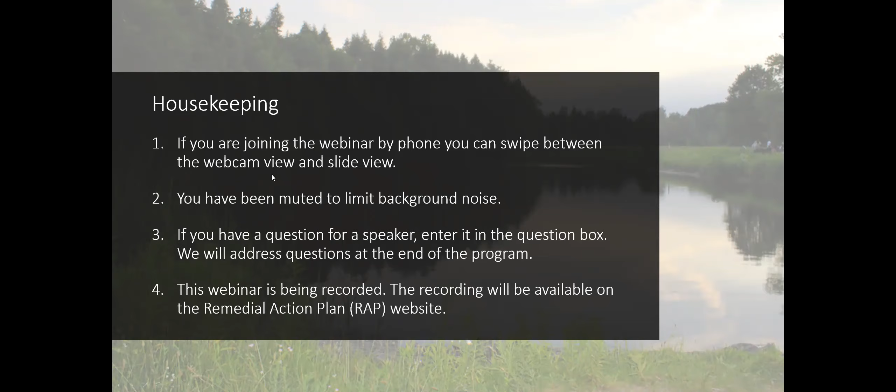We'd like to begin our event this evening with a land acknowledgement. Although we find ourselves geographically dispersed today, meeting here in this online environment, I'd like to begin by recognizing that we all work, live, and gather on traditional Indigenous territory. Toronto Region Conservation Authority, or TRCA, respectfully acknowledges that the lands we're situated on are traditional territories and treaty lands, in particular those of the Mississaugas of the Credit, the Anishinaabe, of the Williams Treaty First Nations, the Huron-Wendat, the Haudenosaunee, and are now home to many diverse First Nations, Inuit, and Métis people.

Through our work with land and water resources within the Greater Toronto Region, TRCA appreciates and respects the history and diversity of the land, and we're really grateful to have the opportunity to work and meet in this territory. We're also grateful for the continued work of many Indigenous peoples who are the original caretakers of this land, and we humbly acknowledge our responsibility to respect Indigenous perspectives and elevate Indigenous voices. We invite you to acknowledge the territories and treaty lands in your local area, and we encourage everyone to explore the interactive map at native-land.ca if you want to learn more.

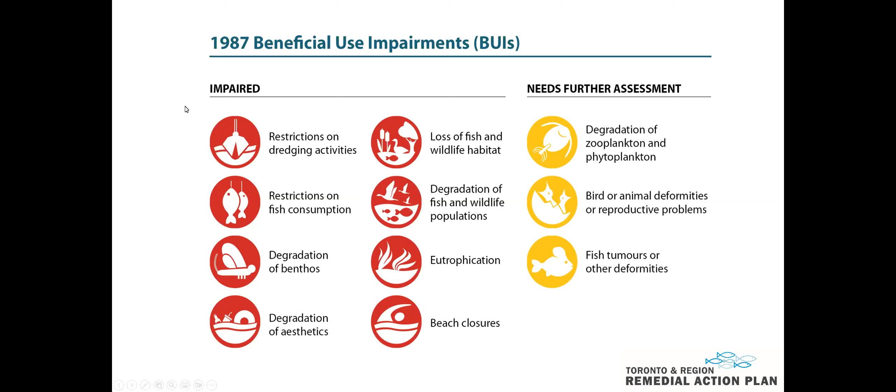The remedial action plan, or RAP, is a unique plan for each area of concern, which identifies actions that have been or are to be implemented by RAP partners in order to address each of the remaining impairments. In Toronto, we've made great progress in the last 30 years by working with partners to implement these actions.

These actions improve water quality and aesthetics, and create and restore fish and wildlife habitats and populations. As a result, 5 of the original beneficial uses are no longer impaired, and progress has been made on the remaining 6.

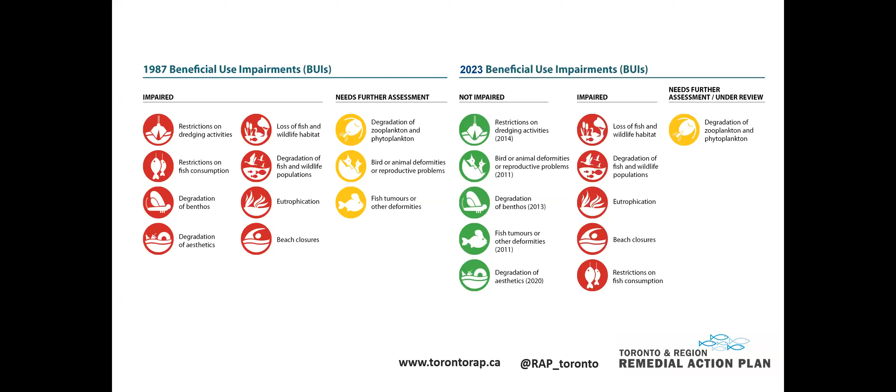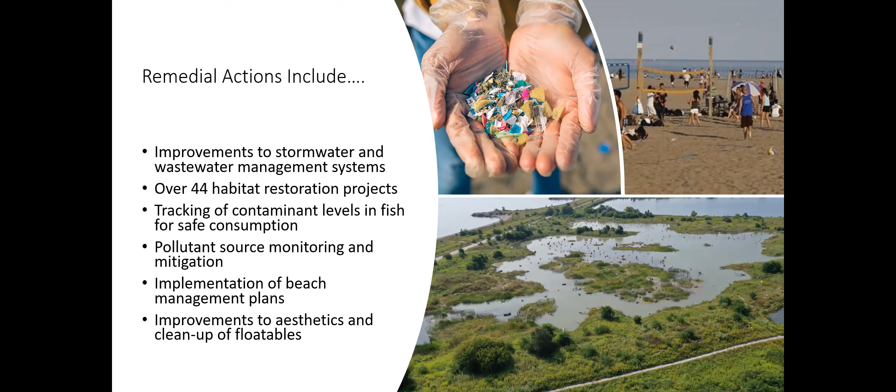Some examples of these actions include sewage and wastewater treatment plant upgrades, which we will hear more about tonight, aquatic and terrestrial habitat restoration across the area of concern, including 44 aquatic habitat sites guided by the Toronto Waterfront Aquatic Habitat Restoration Strategy, implementation of beach management plans, litter cleanups, and a variety of outreach and education activities, just to name a few.

If you'd like to learn more about these or other RAP projects, or view our work plan to see how we plan on delisting as an area of concern, you can visit our website at www.torontorap.ca. You can follow us on Twitter at @RAP_toronto, or email me directly using the address on screen. That concludes my introduction to the remedial action plan.

Without further ado, we will get into our talks. Our first set of talks will focus on upgrades to the Ashbridges Bay treatment plant, with our first presentation highlighting the new Ashbridges Bay outfall, and the second, the new landform.

Our first speaker tonight presenting on the outfall is Kevin Maher with Hatch. Kevin is a senior project engineer, project manager, and associate with 17 years of experience in design, contract administration, and construction supervision of municipal water and wastewater projects. Kevin specializes in pipe design, hydraulic modeling and transients, trenchless technology applications, and tunneling of large diameter water mains, sewers, and outfalls. He also has expertise in project management, construction, cost estimating, scheduling, and construction contract law.

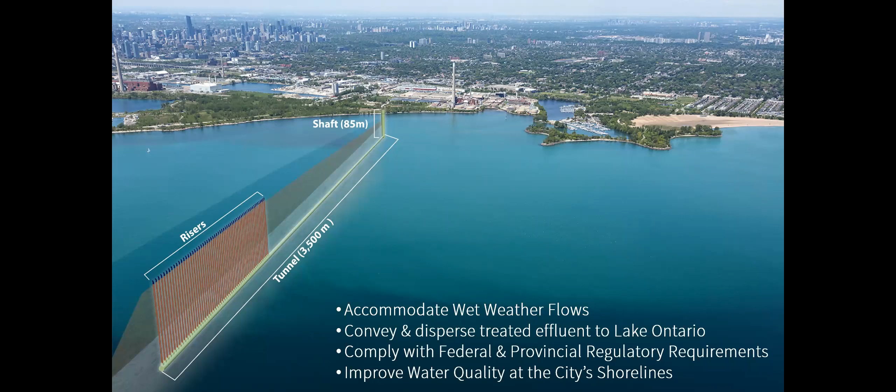The existing outfall right now is nearing its service life. This new outfall, as large as it is, is going to last for the next 100 years. So I'm proud to be part of this major improvement to the city.

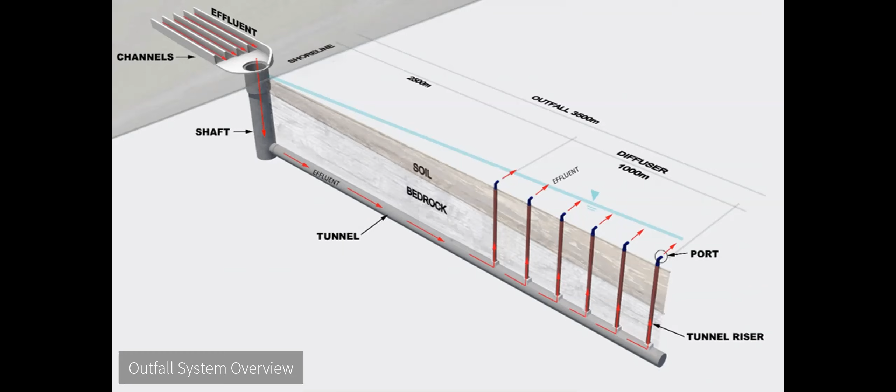Now, an outfall itself, you might wonder, well, why is it this large? Why is it so big? We're going a football field into the ground. And the tunnel diameter actually is about the size of a two-story house - if you drew a circle around it, that's how large our tunnel diameter is.

Well, what we're doing is taking treated effluent from the wastewater treatment plant and conveying it by gravity. Water is going to flow from the treatment plant down effluent conduit channels, and it's going to create a slight pressure differential right at the top of the shaft. That pressure is going to push water down through the shaft, out through the tunnel, and up through each one of these risers. At the end, we'll have a port which helps disperse that effluent even further, at a much greater dispersion rate than currently operated.

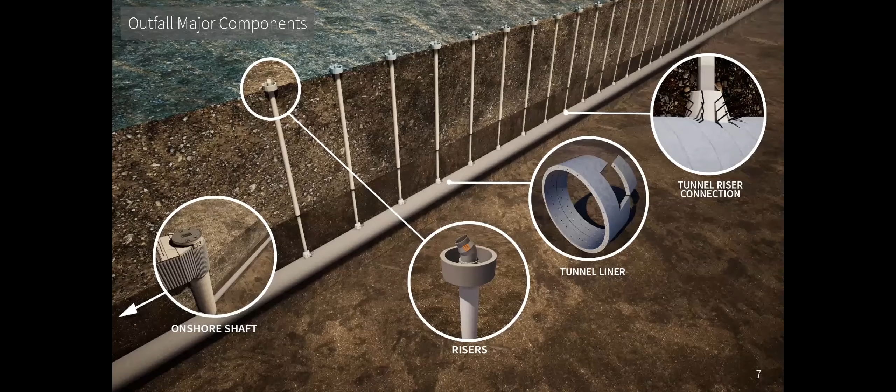Now, from a 3D visual perspective, we have our shaft on the left-hand side, but we also have a tunnel going well within bedrock, and then these risers and even the liner around the tunnel itself - a really neat and nuanced connection between the riser and the tunnel. So you'll hear me talk about these different components as we go forward here.

I figured I'd explain again why it's so large - it's because we have very little energy needed to push all this water out through the lake, or out through the outfall. We spent a lot of time doing hydraulics analysis. So us engineering nerds that love this stuff, we can take our equations and things that we know and translate them into computer models to predict how much energy and head losses are required to push this water out through the outfall.

We're trying to do this without adding any other additional energy, letting gravity work its magic. A lot of analysis went into making sure the hydraulics work. These models look at little finite elements of water and how it conveys, and how the treated effluent moves along the outfall into the lake.

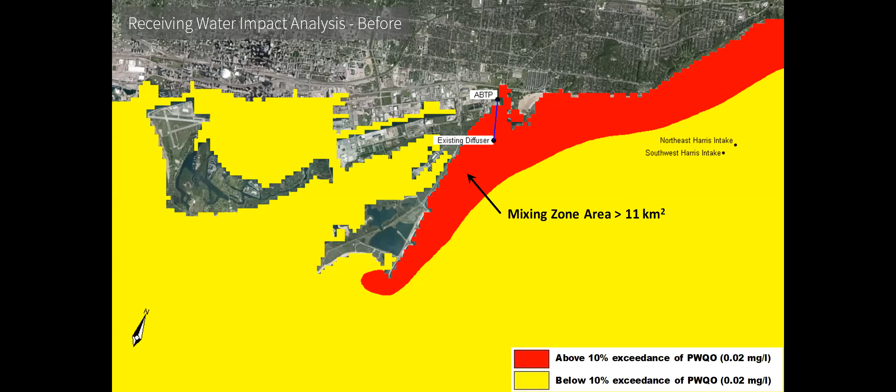So the question is, how can we better improve the receiving water? And how can we prove, more importantly, that we're making a positive change within our local environment, supporting what Don just mentioned with the RAP? As part of this receiving water analysis, we've done our modeling, and we've proven that as we push this water further into Lake Ontario and improve the hydraulics and dispersion, we're having a significant impact not only along the near shore within the city of Toronto, but more importantly, it's dispersing within a larger water body and dissipates a lot quicker. So ultimately, we're making a major difference by pushing this treated effluent further into Lake Ontario.

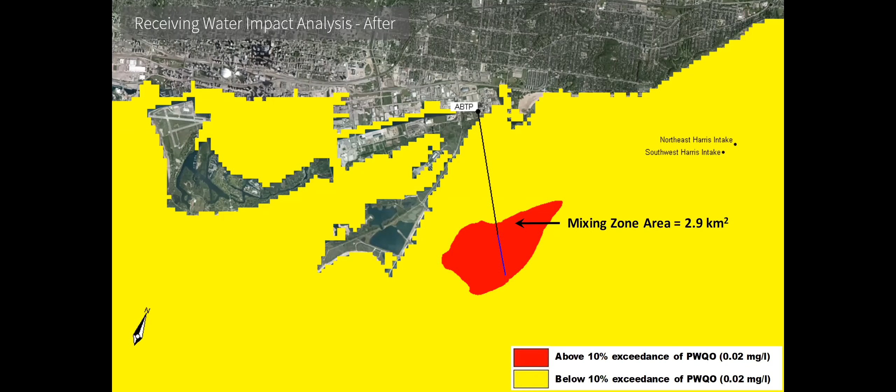The Ashbridges Bay treatment plant is making significant improvements to their treatment quality, but I'm not here to talk about the quality of water — I'll let the other team talk about that. I'm more going to talk about the outfall.

I figured let's explain the sequence of work, because I'm going to go through a number of photos of how we've done this work so far. One of the very first things we do when we build an outfall — in this case, we're very cognizant of even the earlier acknowledgement of lands and waters — we want to make sure any fish and fish habitat and the environment is protected as we do our work.

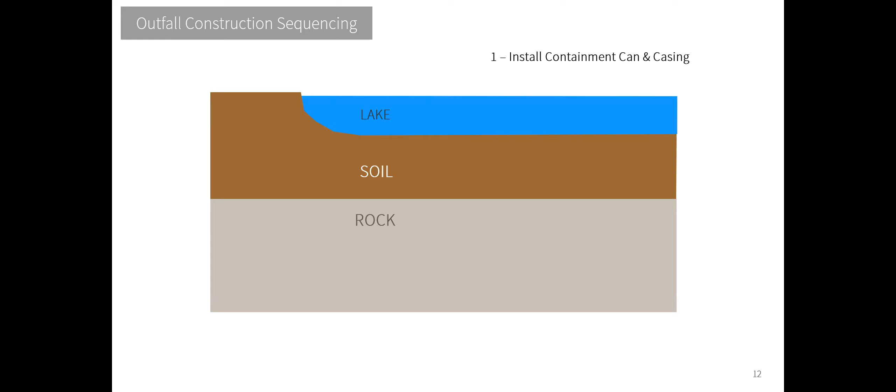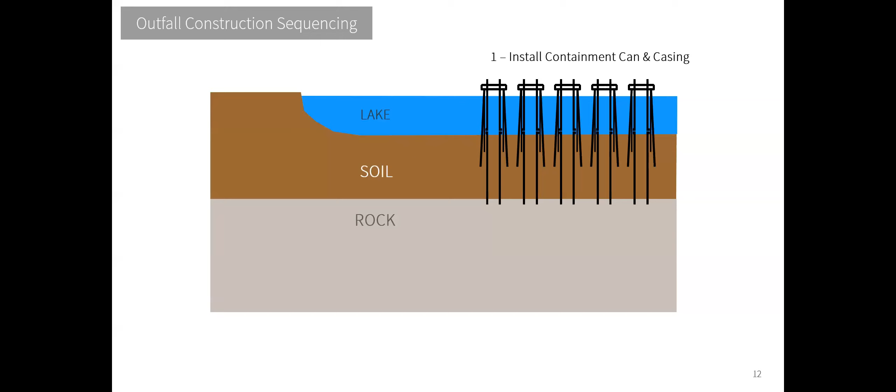So one of the very first and most important features we do as part of this outfall project is to install a containment can and then a casing. This containment can is lowered out into the lake, at which point we lower down casings driven through the overburden or soil and then into the bedrock. We use large vibration hammers to push this into the bedrock. The containment can then allows us to work very effectively within a column of water without disturbing any nearby environmental features.

Once those containment cans and casings are installed, we excavate the soil and overburden — mainly sand and silty sands — from inside the casing. At some point we say, well, we can't excavate anymore, we've hit the bedrock, and yes, we've tried to take as much as possible. We then realize we need to drill a rock socket, and the casing is no longer needed to go any further — we've created a nice seal within the rock as well.

So what we do is use very specific technology to drill a rock socket, going further down into the bedrock to approximately just above where the tunnel is supposed to be.

Once this entire casing is excavated, both between the soil and the rock, and it remains flooded, we then go ahead and install the riser pipe.

Now, this is one of my favorite steps in the project, and you'll see a photo why shortly. Effectively what we're trying to do here is install a stainless steel pipe that goes down to the intended location where we're going to connect to our tunnel. Then we're going to grout around it, filling in the gap between the casing, the rock, and the pipe — the annular space between the two. We're going to put the concrete inside, and we're going to test to make sure there are no leaks.

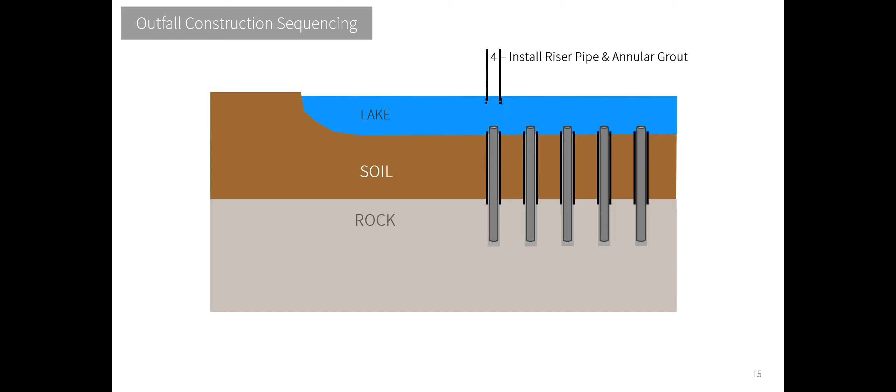At this point, the in-lake water side of things around the riser pipes is effectively completed. The next step is to protect these riser pipes, because once installed, they'll be in for another 100 years, and particularly with stainless steel, it's very hard to repair underwater. So we're going to lower down concrete maintenance holes to protect the top of the riser pipes.

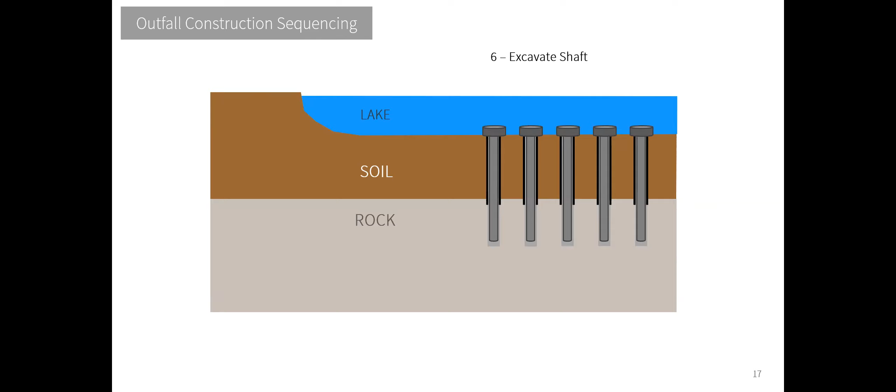All the while this offshore work is being done, we recognize there's an opportunity to excavate the shaft, that's one football field down through the bedrock and soil, and we're going to build that at the same time we build the risers. Now, here's where the scheduling concerns come in.

The last thing you want to do is start to build a tunnel as you do the risers. So it's very important that we spend our time at the onset building these riser pipes, making sure they're all leak tested, because at some point we'll tunnel underneath each one. The last thing we want is any exposure or risk to our tunnelers down in the tunnel from water coming in.

Ultimately, once these riser pipes are installed and we've tunneled underneath, we can go ahead and make the final connection between the tunnel and each riser. It's a small nuance, but a really important one, because that's the final piece that puts everything together.

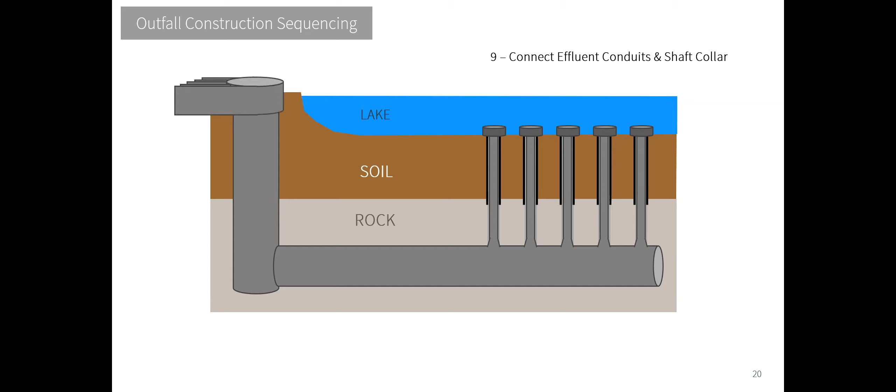Once those tunnels and risers are connected, we're going to build a large effluent conduit structure. That's a concrete structure, basically 6 different lanes of highways transferring water from the UV disinfection facility to our shaft. We'll build it at the top of our shaft and make this final connection, all done in the dry. At which point, all our work is generally completed.

We're then going to flood the tunnel, get some divers out there, open up some valves, and flood the tunnel, taking time to build up the water slowly. Then one of the last steps is to mount the ports, small nozzles at the end of each pipe. Once this work is all done, our outfall is ready for operation. We could take the treated effluent from the wastewater treatment plant and convey it out into Lake Ontario.

Now, from a construction update perspective, I'd love to show all these steps in photos, and we've got some wonderful photos from a great team I'm working with here. We started this project back in 2019.

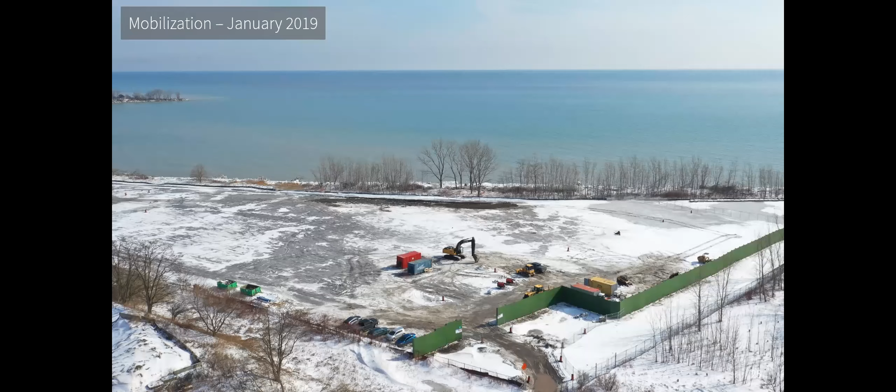We worked on the edge of the shoreline here, and what looked like a pretty good space actually turned out to be the right space. We have a lot of great features that our team and contractor benefited from as they occupied the space, and the tunneler finally said to us, 'Toronto and Hatch, you actually gave us enough room to build our tunnel. Usually we have a very small sliver of land, but in this case you've enabled us to use every inch.'

As time goes on throughout the summer of 2019, our tunnel and compound start to form. What looked like a smaller space now has temporary shelters built with sea cans, and on the right-hand side, stormwater management ponds to make sure any water generated on site is treated and stored, eventually pumped back to the wastewater treatment plant. So a nice little area we can work on our own.

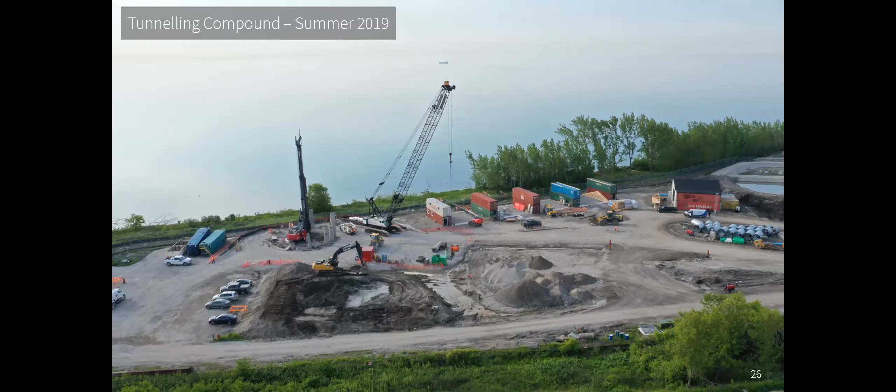That said, as I mentioned earlier, as our sequence of work starts up and we want to build our risers, at the start of this project one of the first things we did was get out there with our jack-up barges and floating spud barges and start building those containment cans and casings, then excavate inside of it.

One of the purposeful things is we wanted to do the very last ones first, just to make sure that the ground we predicted through a lot of investigations was accurate, and that our tunnel didn't have to change. Our baselines hit the mark, and we managed to not have to make any changes during design. That's the last thing you want to do, but in this case, everything met our expectations.

Now here's one of my favorite photos on this project.

This is where the riser pipe goes in, and each one of these riser pipes is about 45 to 50 meters in length, that's half a soccer field length. Each one welded all together, lifted up all at once, and then lowered down in.

I couldn't have predicted this as an engineer who professionally designed and stamped this work, but when you lower down this pipe, there's a neat little waterfall effect that occurs as the water cascades out, and the pipe is lowered into the water column in that excavated shaft. You can look at the size of this compared to the workers in the background here. We're talking about some big stuff, so really neat to see this work being done in person.

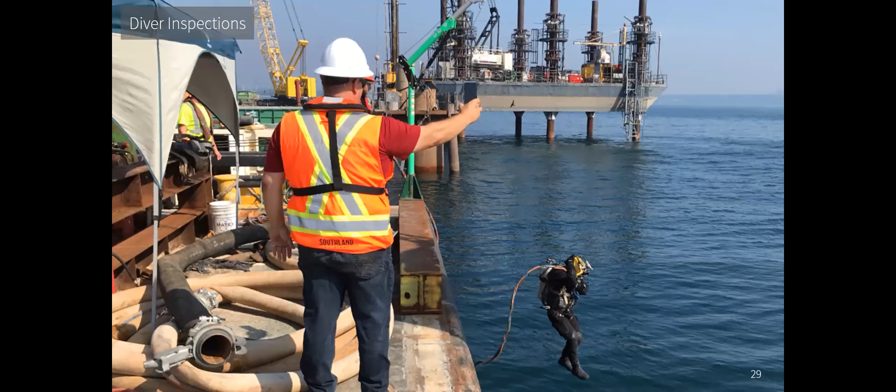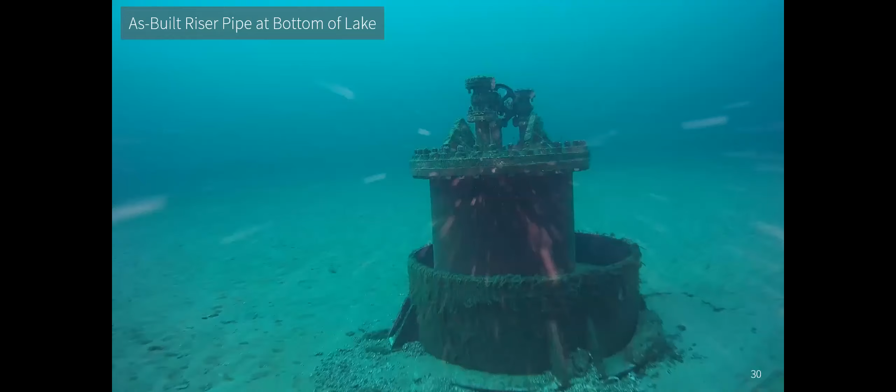Once all the riser pipes are installed and grouted, the other thing we wanted to do is inspect each riser pipe with divers, just to make sure everything has been installed. Here's a nice photo of what the riser pipe looks like from the divers' operations, a remote operated vehicle. So this is what the end product looks like before we install that port protection, that concrete maintenance hole.

This includes features like biofouling mitigation, and ultimately, this is where we're going to flood the tunnel using those valves too. So pretty nifty stuff, and this is the final result where no one's probably ever going to see it again unless you throw it on a camera or have a diver down there.

Now back on the surface, as the riser pipes were installed and we got through that interesting challenge, at the end of the day we wanted to build a shaft. We're building a shaft through sand on the surface, right near the lake. So there's a very specific type of construction that involves shaft secant piles, where we've built a ring of concrete all the way around a big circle. It's the intersection of these different piles that creates almost a concrete curtain that then allows us to dig down through the sand without any water coming in.

So it's a sealed type of construction, in a way that allows us to build our outfall shaft without having inundation from water. Here's a neat photo from a drone looking straight down at the rather large crane there, and that's one of the first efforts in us removing that sand.

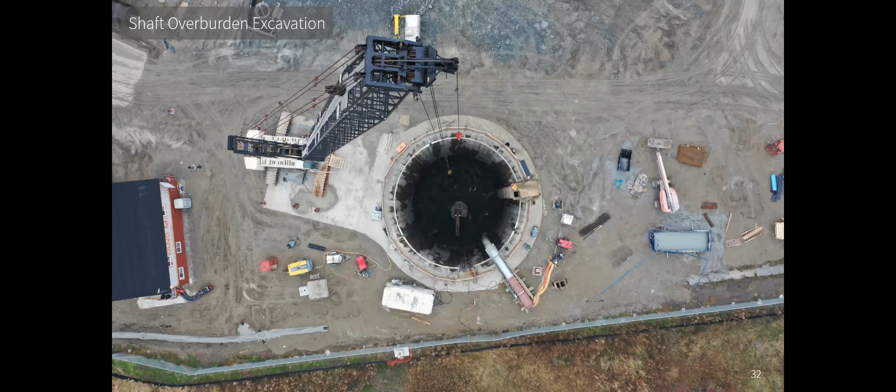I'll be honest, at the onset of this shaft excavation, we had a third of the shaft excavated in two or three days because, gosh, sand's pretty easy to move around. But it does get tricky when we then get down further into the bedrock.

This is one of the first few photos of us starting to build the shaft within the bedrock. There are certain attachments you can add to excavators that start to grind the rock. But what's neat about this photo is it shows what the bedrock looks like about 40 or 50 meters underneath the ground. In this case, you can even see the engineered system designed on the side, with a combination of wire mesh, rock bolts, and shotcrete. So as we dig down, we start to replace and support the bedrock around us.

So a neat little photo here from the ongoing construction. Now, once we get to the final intended elevation of where we start our tunnel, this is where our tunnel starts to form, and this is what we call the starter tunnel heading.

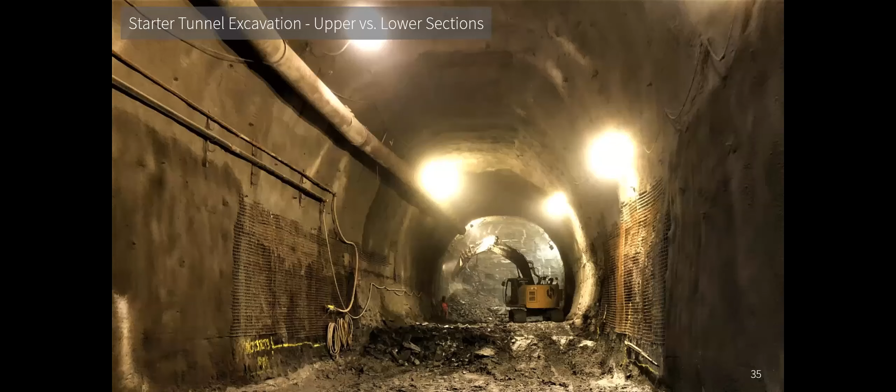This is where we build our shaft and start to go horizontally as opposed to vertically down through the shaft. Again, a really neat photo, and you can see the size of this tunnel. At the time, this was the largest tunnel being built in Toronto, though we're the second largest now. Here's another photo as we build our starter tunnel.

Now, the interesting thing about our starter tunnel is what the contractor elected to do: try to go about 100 to 120 meters past the shaft out towards the lake, all within bedrock. They built it in two sequences, one with the upper arch, and then finally the second with the final invert. But it's very purposeful why our contractor and tunneler did this. They wanted enough space to assemble a tunnel boring machine all in one shot, as opposed to building it piece by piece. So there was a slight change, but we worked with them, and ultimately we built a brand new starter tunnel that goes out into the lake.

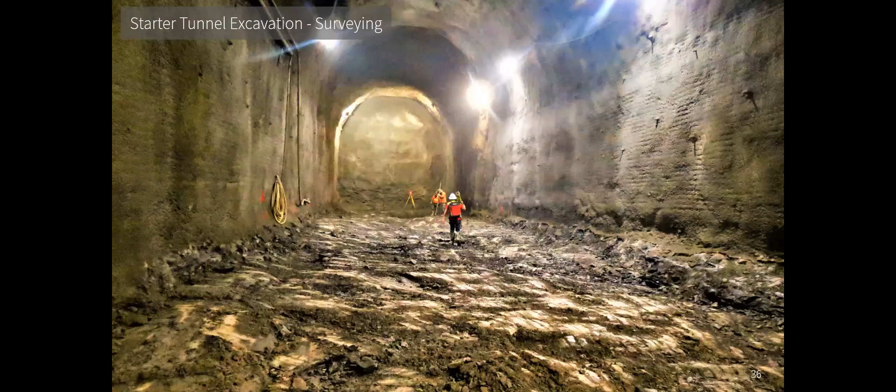One of the last steps of the starter tunnel is to get that right proper elevation where we can launch our TBM in the right direction at the right trajectory to go in and intersect the risers out in the lake about 3.5 kilometers away. So a lot of time was spent checking, and triple checking, double checking, and triple checking to make sure our alignment was correct.

Now, here's a photo of a starter tunnel. I hope you don't go away thinking this is what every starter tunnel and every tunnel looks like within Toronto - I can guarantee that's probably not the case. This is probably the cleanest tunnel that Hatch, our team, has ever seen in our entire careers and on many other projects we've worked on. But I'd love to share this photo because it speaks to the professionalism and quality of this contractor, and ultimately the intent on doing things right and building things right. It's a fantastic start when you see a contractor building to this level of quality - it looks pretty impeccable.

What you'll see in the middle there, those are 2 tracks, and that's where we're going to place our TBM as we build it. It's going to go the entire length of the starter tunnel.

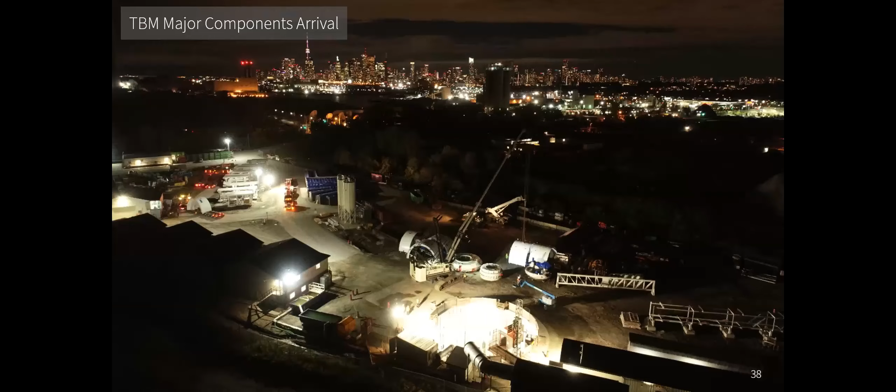At that point, once the starter tunnel is built, we can then take the different tunnel boring machine components, these major ones that were shipped actually coming from all across the world - a cutter head from China, the TBM itself came from Mexico, many different parts from, even apart from Germany too, I believe. So it was a worldwide adventure to build one of the largest tunnel boring machines locally here. And this was all done under the guise of night - you probably never saw it because every piece of equipment came late at night.

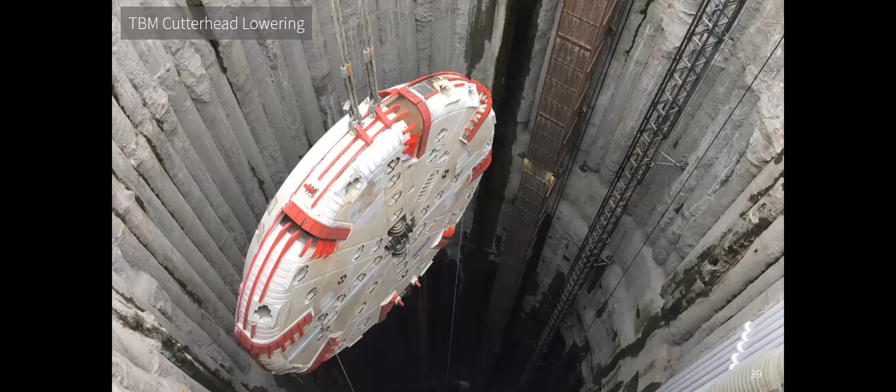One of the neat things about installing a TBM - well, this is what it looks like at the front, and this is the cutter head. It's not boring stuff, it's pretty cool in my eyes. This is the very front where there's disc cutters that work against the bedrock and start to break it apart, then convey it out - ingest the bedrock and bring it out through the tunnel boring machine into the shaft. Here's what it looks like, and that's probably the last photo you'll see of the cutter head, because once it's installed and pushed in front of the TBM, there's very little chance to see it again.

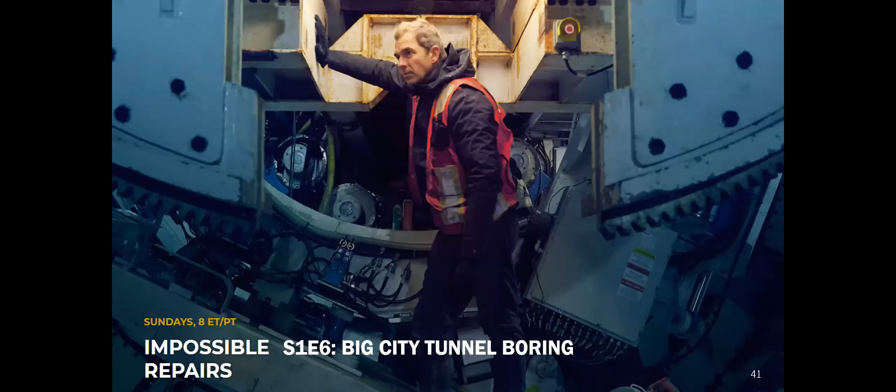I will hint this - we had a documentary on this project, and it was at this moment here that we had a very interesting event take place. I'd highly recommend, if you're interested, there's one on the Smithsonian Channel, and I think it's called now a season called Impossible Repairs. You'll find it online - it's season 1, episode 6. The last one was the best one in my eyes, and it's called Big City Tunnel Boring. If you want to hear more about our trials and tribulations leading up to the first time we started tunneling, go watch that video. It's very entertaining, probably overly dramatic, but it's a lot of fun. Take a look at it if you get a chance.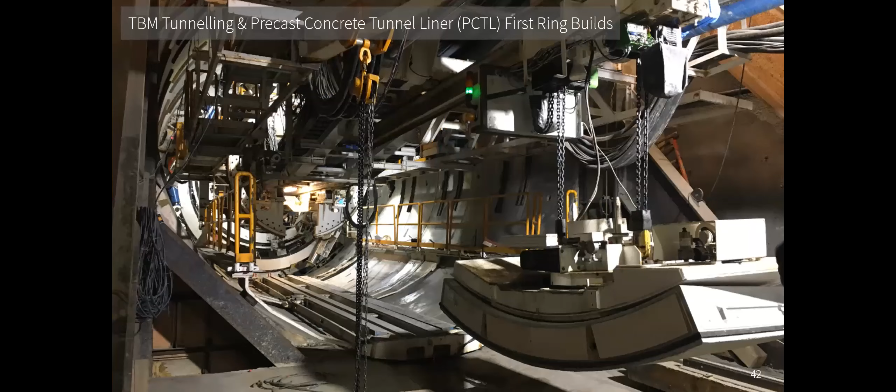That said, one of the first things we did as we built our tunnel - as the tunnel boring machine works its way and starts to extract the bedrock, ingest it, and move it out of the tunnel - we start to install what I said earlier is a precast concrete tunnel liner. That's effectively 6 different pieces that form a large circle or ring. As these segments are installed one by one, it creates an arch-like support around the perimeter of the tunnel as we build it out. And as each ring is built, we push off of it and continue building the tunnel going forward.

I'll be honest, from here on in, most photos are very consistent. This is what it looks like, and it doesn't change other than you notice the ring we're a little bit ahead, but every photo looks like this for the rest of the tunnel. Kind of boring stuff, but it's really neat. At the top there's actually a yellow marking, that's where we get all our air supply within the tunnel. But again, you can see the magnitude of this tunnel, how large it is, just with this photo alone.

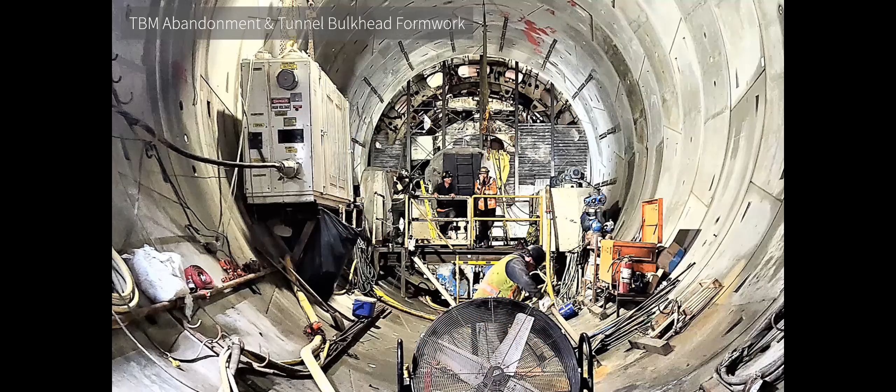Once the tunnel's done, the tunnel boring machine -- since we didn't have an exit shaft, we couldn't pull it out of a shaft, and we weren't going to do it out in the lake that deep below -- so what we did was abandon the TBM. That means removing every piece of major equipment, hydraulic hoses, oils, everything like that, and leaving only two things: the cutter head, that large piece at the front I showed earlier, plus the shield.

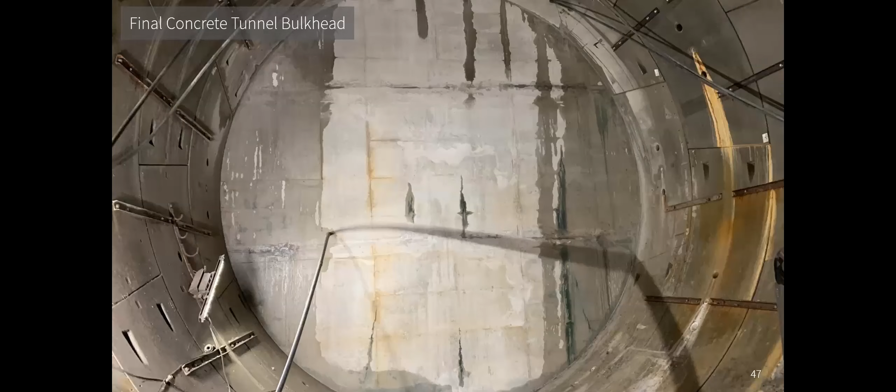The remaining components are basically concreted in place. We filled a formwork behind it and filled it up with grout. So this tunnel boring machine, at least the big steel shield and cutter head, is going to remain in the ground for the foreseeable future -- it'll be an ancient relic of human civilization at some point. All we get to see is concrete grout plus, at the end of the day, a final concrete wall. Anticlimactic, but pretty neat stuff in my eyes.

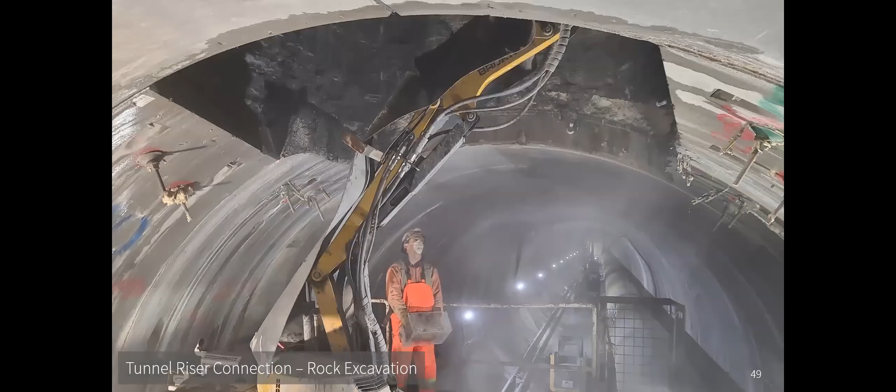Now what we're currently doing within the tunnel is building that really interesting connection between the tunnel crown and each riser. One of the first things we need to do is remove those concrete segments I mentioned earlier that create that arch-like support. Not only do we remove it, but we also need to dig up through the bedrock and make our way up to the riser pipe just above us.

This is pretty big stuff -- we have a number of platforms working in the background. It's all done by robot to reduce safety risks for workers. The last thing we want is any excavation-related harm, and we're always trying to achieve no harm with what we're doing on site. But ultimately, you can see this is a rather large excavation being done to make a small but very important connection between the tunnel and each riser.

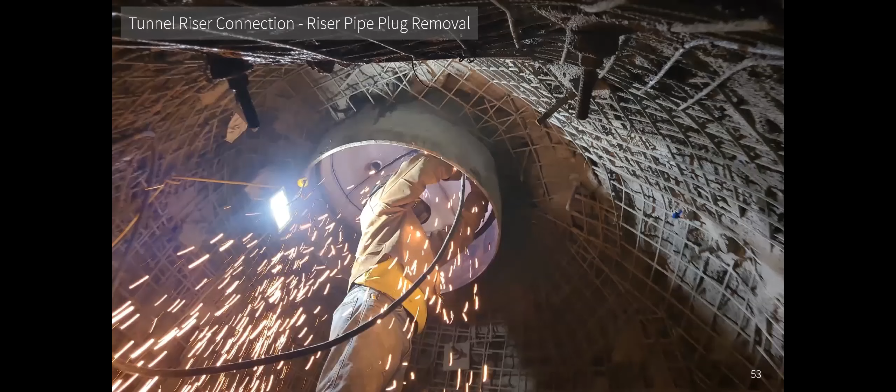This has given us the reassurance we need whenever we drain each riser. It's pretty neat when you have a tunnel flooded with yellow dye -- kind of cool, and I don't think many other tunnels have done this, but we did it on ours. It's been a great success. Once the riser pipes are drained, we then remove the bottom riser plug.

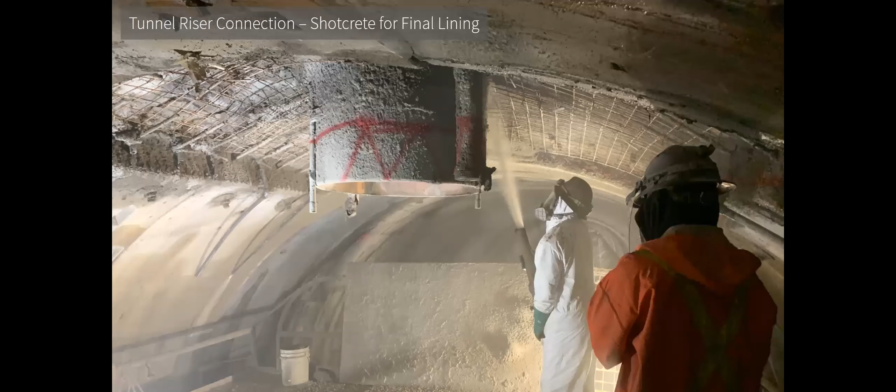At that point, we're going to attach some structural members and then build up the shotcrete and reinstate that concrete liner that used to be there. This is our current status within the tunnel at a number of risers, where we have a pipe that projects into the tunnel. We're going to trim it flush with the top of the tunnel crown. We've got about 10 or 12 of them done, and so far great success from our team, no water, everything's going as intended.

Meanwhile, we're building an effluent conduit, that large structure that connects the UV disinfection facility and Ashbridges Bay treatment plant to the shaft itself. That's underway as of the end of 2022. We installed some dewatering and got to a point where we installed a mud slab and a concrete slab, for us to build pipe piles, which are large steel members inserted into the ground to help support that concrete structure.

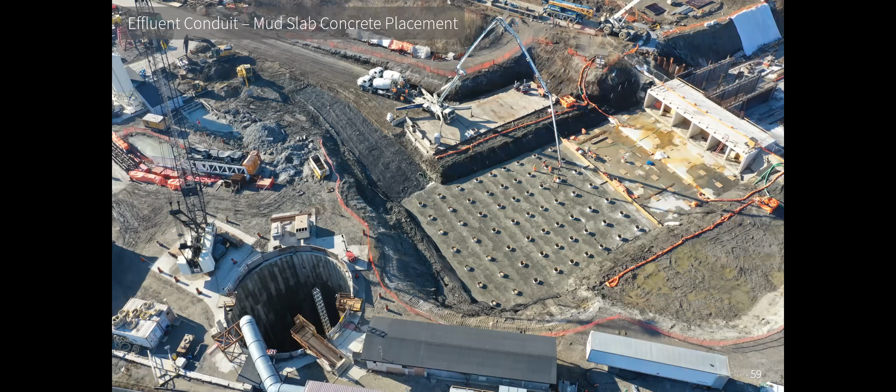This is probably one of the last photos I have, taken a couple of weeks ago. This is where we're at with the effluent conduit structure. You can see the final connection will be done at the shaft and make a final monolithic concrete pour at the end of the day.

It's exciting to showcase the wonderful things that I get to be a part of, and my team. It's a blessing to work with them, doing some fantastic stuff, and to celebrate the great successes we had, because at the end of the day the positive change that we are going to bring to the City of Toronto by this project gives me great pride and pleasure. I'm very proud to be part of this project, and you can see it as well.

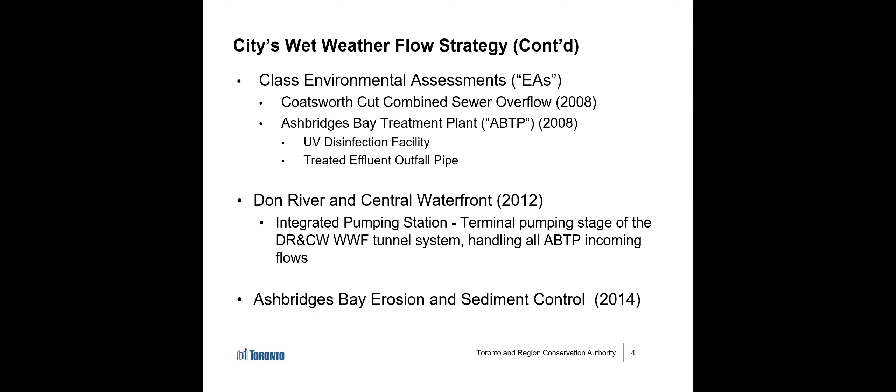And last but not least, the Ashbridges Bay Erosion and Sediment Control EA in 2014, which resulted in the construction of this landform.

The current wet weather flows management in Toronto takes the sanitary and storm sewers combined and conveys them either by gravity through Coxwell, the sanitary trunk sewer, or through M&T buildings to Ashbridges Bay, which then treats them and discharges into Lake Ontario.

The future strategy, what we are building now, is separating the stormwater flows, buffering them in underground storage tanks or the tunnel system, and then sending them to the integrated pumping station, while also maintaining the Coxwell gravity storm sanitary trunk sewer pumping to Ashbridges Bay. A portion of the stormwater goes to high rate treatment, and then the combined effluent is sent back to Lake Ontario.

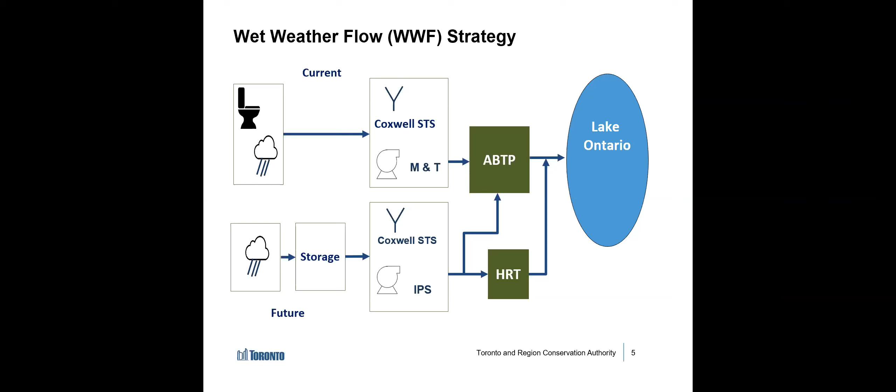Just a quick overview: a total of 22 kilometers of tunnels integrating into one system, 12 storage shafts, 27 stormwater and CSO connections, and offline storage tanks, 7 of them, will be part of this Don River Central Waterfront program, with everything culminating in real-time control to regulate flows in the city sewer system.

A dedicated high-rate treatment facility will be constructed on the lakefill, on the landform project, in the real estate we created for this project. Once everything is said and done, it will virtually eliminate CSOs in the Toronto Inner Harbor, Don River, and Taylor-Massey Creek areas.

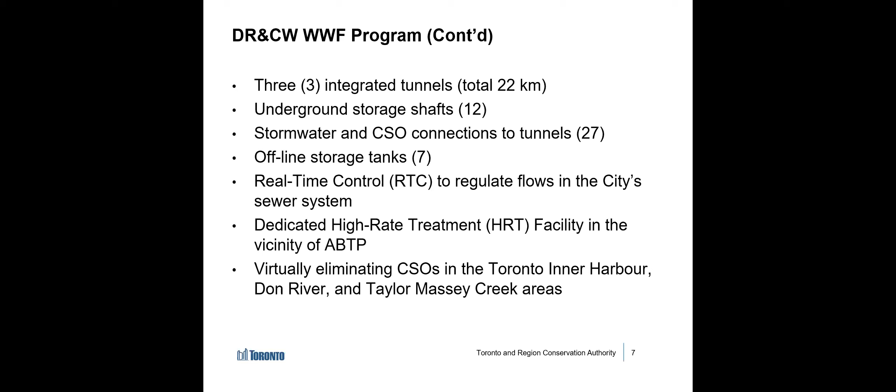That's the largest treatment plant in Canada, as Ken was saying, 818 million liters a day, with a peak factor of anywhere between 3 and 5. And without further ado, Jet.

Great, thank you very much for that, Vlad. And thanks, Don, for the introduction. Hello everybody, thank you for having me here.

So I'm going to move on and talk a little bit more about the construction side of things. But first, I wanted to walk you through some of the steps that led us to construction, and briefly revisit the Conservation Ontario Class EA that we did. Then some changes that happened through the detailed design process between the EA and detailed design, some of the approvals, and then the construction. So you can see our step 1, 2, and 3 there. We're currently about halfway through step 3.

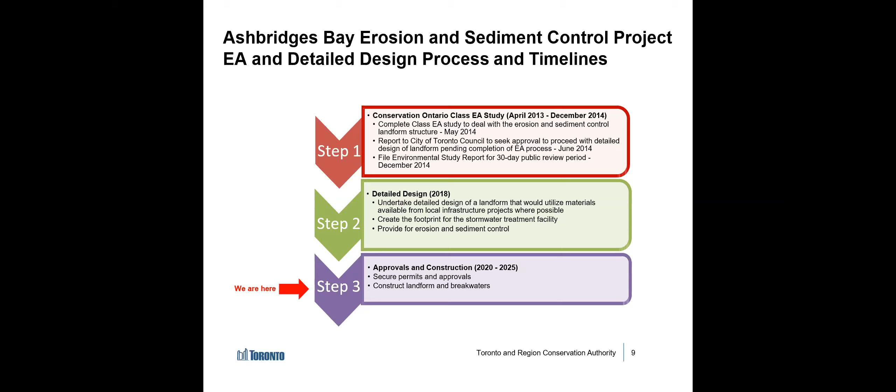So the objective of the Class EA for the erosion and sedimentation component of this project was to identify a preferred solution that will mitigate the risk to navigation due to sediment erosion and deposition at the harbor entrance of Ashbridges Bay and Coatsworth Cut, while considering the various approved facilities, planning initiatives, and current uses in the study area, which Vlad just talked about.

So the results of the environmental assessment: in the photo on the right, there are two different shades of green. The dark green components of the project were captured in the TRCA environmental assessment, and those in light green were captured in the various City of Toronto environmental assessments.

So the preferred alternative provides the least impact to water quality in the recreational areas, the best integration with current Ashbridges Bay treatment plant operations and flexibility with future ones, and decades of safe navigation without ongoing maintenance dredging, which is happening annually right now, along with enhanced erosion protection.

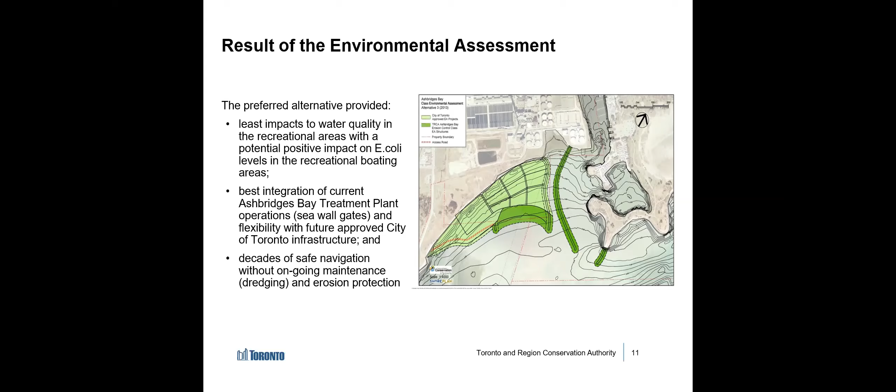Following the environmental assessment, we moved towards detailed designs with the final product shown on the screen. There were a few noteworthy changes between the EA recommendations and the detailed designs, which are highlighted in red.

The first was a shift in the central breakwater towards the west, which allowed for more habitat enhancements on the east side of the breakwater without spilling more into the channel entrance and impeding recreational boating. Secondly, the central breakwater was slightly reconfigured at its tip to widen the gap and stay outside of the right-of-way for the existing treatment plant outfall that extends between the landform and the central breakwater.

And lastly, on the bottom left of the screen, while we were in detailed designs, there was severe damage caused in this portion of the shoreline along Tommy Thompson Park following the April 2018 wind event that many of you may be familiar with. The erosion was pretty dramatic in this area, and it completely took out a worn trail.

So we opted to add an additional headland and extend the landform slightly to the west to provide more protection to this vulnerable area.

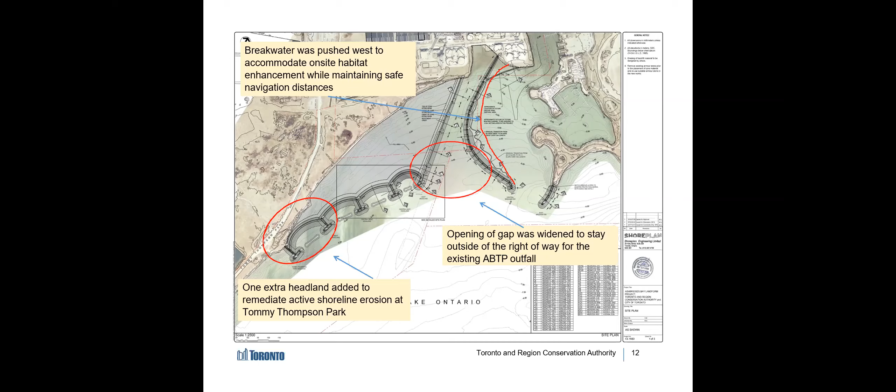The Transport Canada and Ports Toronto permits are more focused on navigation risks and limiting those risks. We worked with them on such items as notice to mariners, updating mappings, and temporary and permanent navigation lights on each of the structures.

Although the primary consultation component was undertaken as part of the EA process, we did continue through the detailed designs and into construction to consult with engaged stakeholders such as Tommy Thompson Park, First Nations, and local boat clubs.

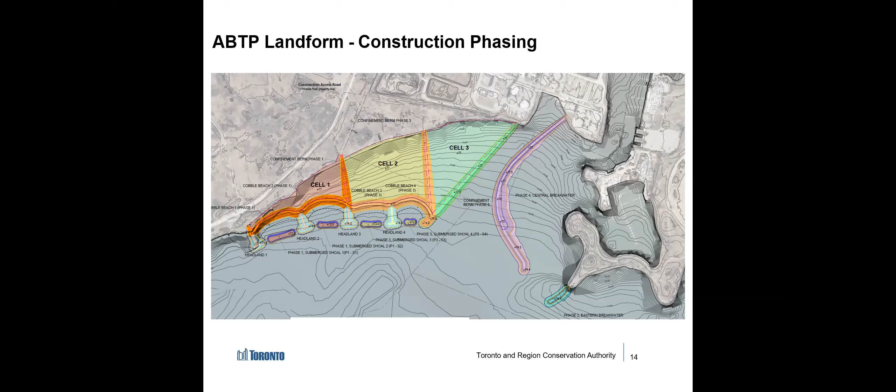So now for our on-site aquatic habitat compensation. Historically, the Ashbridges Bay area was a large marshland complex, originating as a delta formation at the mouth of the Don River to the west. Before filling of the bay began in the early 20th century, the fish community was linked to the Don River watershed. Today, due to development and creation of the Leslie Street Spit, it is open coast habitat characterized by extensive wave and wind action and cold water. These are factors we took into consideration when looking at habitat options.

As you can probably see, the text is pretty small. We've incorporated habitat components that are varied by type and location. At the southern portion of the headland, we have cobbled beaches, retained between the headlands. There are 4 cobbled beaches, each with woody debris embedded in them. Just offshore, there are submerged offshore shoals or reefs of various size aggregate.

Along the central breakwater, there's submerged structural habitat, similar to the shoals, and there's a submerged sunken tree field at the base of the structure. Close to where it connects to the treatment plant facility in the north, there's a shoreline naturalization area similar to a wetland.

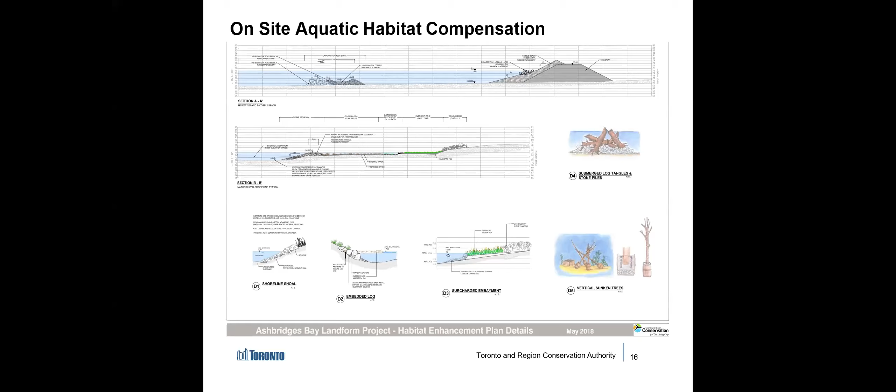First, the perimeter berms were built first. They were constructed using core material, largely, which we were able to get for free, and then capped with larger material for extra protection. Once this was completed, we were able to accept excavated material from the Coxwell bypass tunnel, the treated effluent outfall tunnel, and the integrated pumping station, to fill the cells.

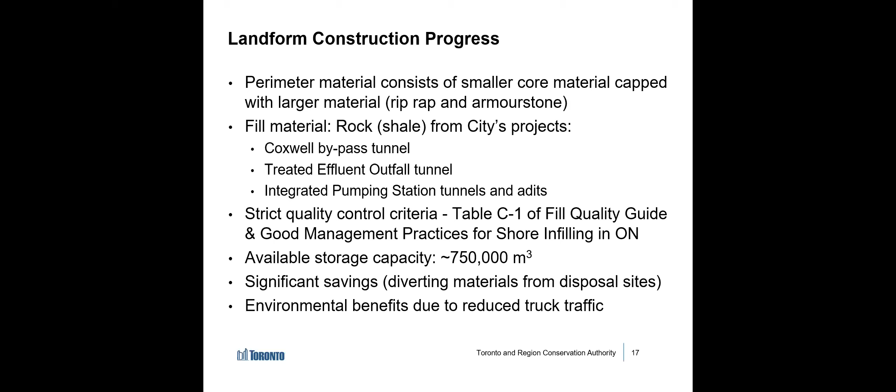Testing was done on all of this material before being brought to site, and every 100 loads were set aside and tested on site to confirm all quality control criteria were being met. The shale storage capacity of the entire landform, cells 1, 2, and 3, is approximately 750,000 cubic meters. Being able to accept this volume of material so close to where it was generated created significant cost savings and environmental benefits, from not having to divert this material to off-site disposal facilities, most of which are outside of the GTA.

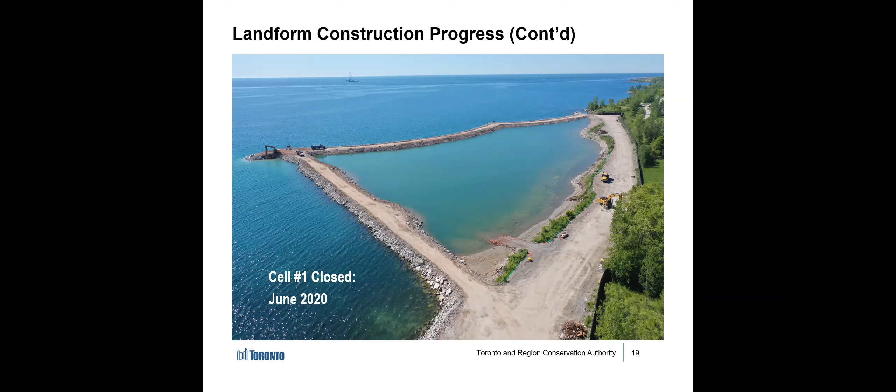This was going to maximize our time efficiency on completing the cells so we could accept the shale material quicker. By June of 2020, about 5-6 months, we completed the perimeter berm for cell 1, building from both directions as I mentioned. We were then ready to start accepting our first load of material, which came from the Coxwell tunnel. The first truck came in on July 6, 2020.

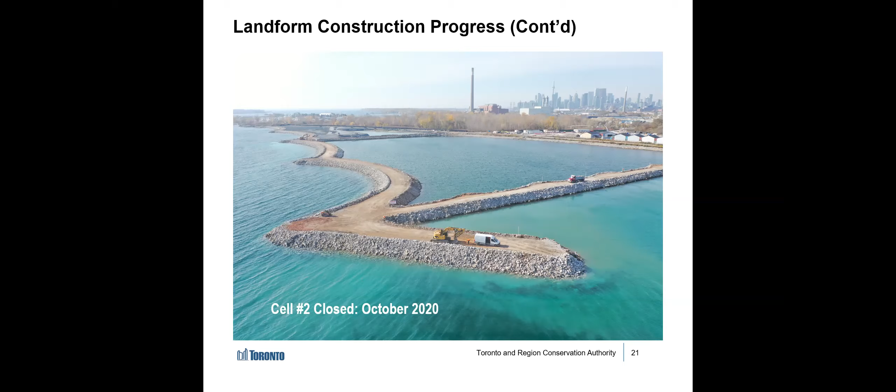Continuing on, by October of 2020 we'd closed off cell 2. I think you're starting to get a scale idea of the size of this project - it's about 17 hectares. Our construction crews worked tirelessly getting all these perimeter berms in place so we could be accepting these volumes of shale from all the tunneling projects.

While that work on the landform was going on, our barging contractor was building the eastern breakwater, which was done throughout 2020 and substantially complete in December.

So by the end of January 2021, basically a year into the project, all of cell 1, which is our second to largest cell, cell 2 is the largest, but cell 1 was completely filled.

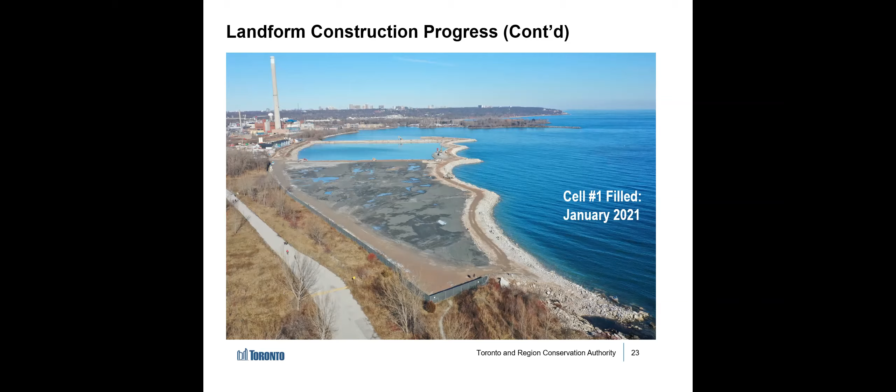On April 13th, 2021, the outfall tunnel, from Kevin's presentation that he just did, got the first load of shale from that project.

And a big day here in May 2021 is when we completed the final construction berm and completely isolated all 3 cells from Lake Ontario.

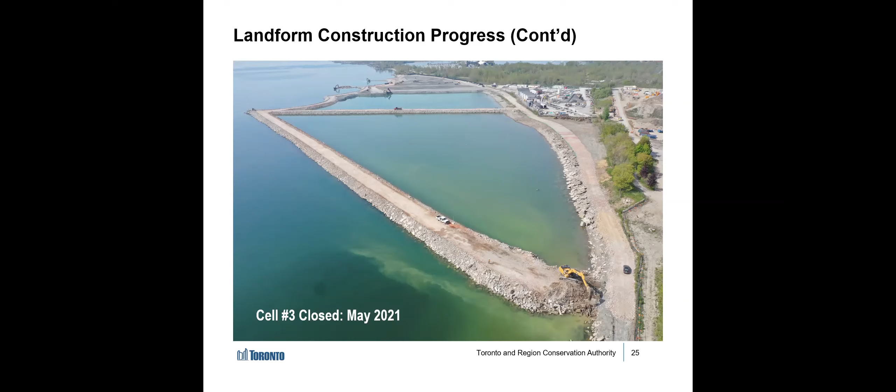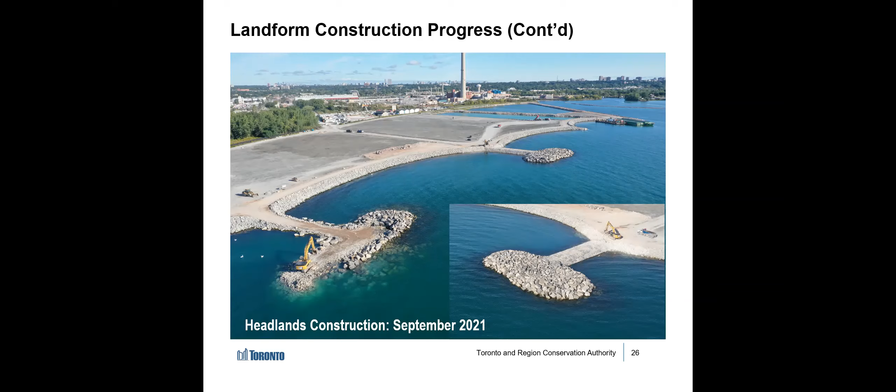This was a bit interesting - Kevin was talking about the work out on the outfall, and the majority of the fill came from the actual tunneling down, but there was some dredging required out by the risers in the lake that needed disposal. So instead of bringing it all to land and then trucking it to a disposal facility, we were able to facilitate disposal of this sediment, a relatively small volume compared to the shale we were bringing in. Through the perimeter berm, you can see there's a little tunnel that goes through there where the sediment was pumped and then covered up with shale. This saved a lot of time and money for both projects.

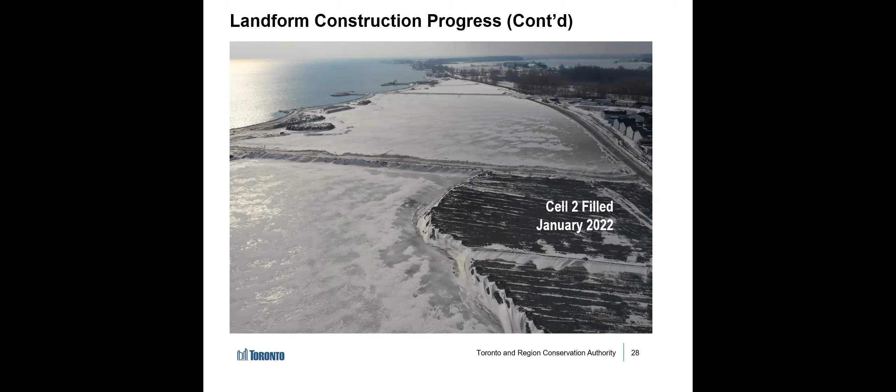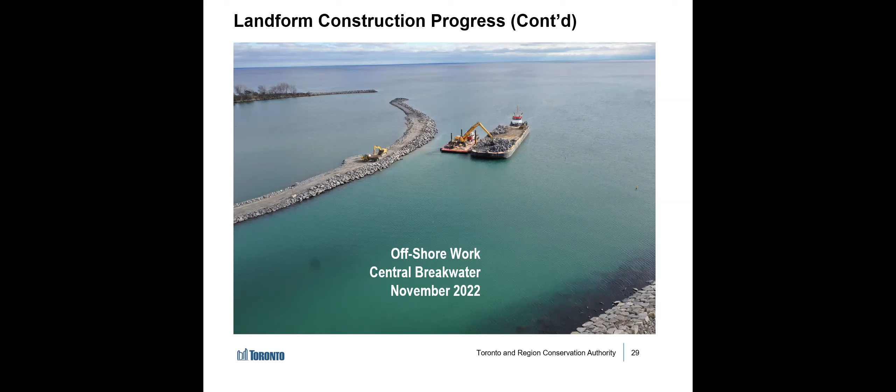There's a good look at the central breakwater, how large it is. And we're continuing to fill cell 3. We expect to have that filled in the next couple of months. There's a bit of a delay or shortage in shale material coming through, but we'll have that filled in the next few months.

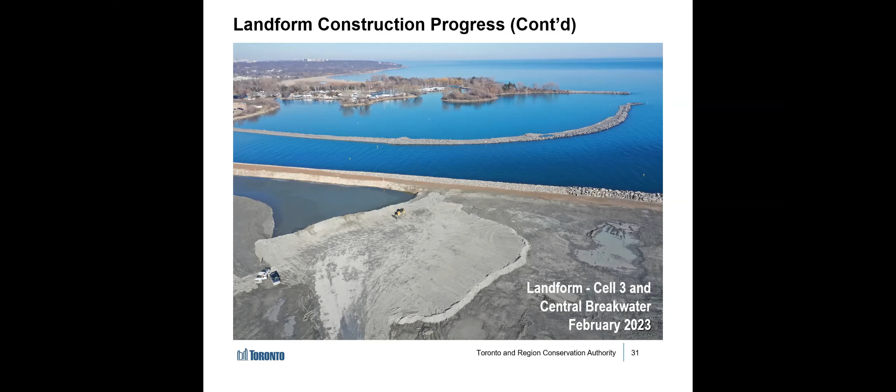And that was the last one.

So we have an acknowledgement slide here. There are so many people working on this project and doing great work, from construction, survey, monitoring staff, project management staff - too many to list, obviously. So we just wanted to acknowledge the City of Toronto, primarily Toronto Water, everybody working on the project at the TRCA, as well as the Outfall Tunnel project team, the Coxwell Tunnel project team, and the Integrated Pumping Station.

And that's it for the presentation, and we're open to questions.

Awesome. Thank you. Thanks to both of you. I'm not sure if you're seeing too, but again, lots of love coming from the audience, lots of applause, lots of thumbs up.

Thanks very much. We do have lots of questions here, and I see our team of panelists has been working diligently to answer a lot of those, but I will ask some of the more frequent questions. So a lot of questions coming in with regards to access, and if when this is completed, if there'll be a trail system connected to TTP, and if that will be open to the public.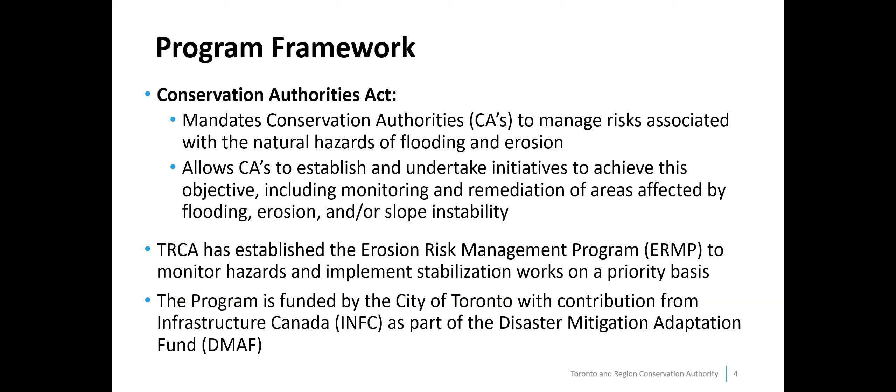Our waterfront program is funded by the City of Toronto, with contribution from Infrastructure Canada as part of the Disaster Mitigation Adaptation Fund.

For our funding sources, our waterfront major maintenance portfolio is primarily funded by Toronto Water, with funding projected over 10 years and confirmed annually. The funding comes from 2 budget tables, with the bulk coming from critical erosion and flood works. For perspective, our 2023 budget is approximately $5 million.

In 2018, after the high lake levels of 2017 and the large windstorm in April 2018, TRCA submitted a proposal to Infrastructure Canada's Disaster Mitigation Adaptation Fund, and we were successful in obtaining matching funding up to 40% of our eligible expenditures under the waterfront major maintenance portfolio. This top-up to our waterfront program should allow us to work through our backlog of repairs and bring the majority of our 233 erosion control assets to a state of good repair by 2030.

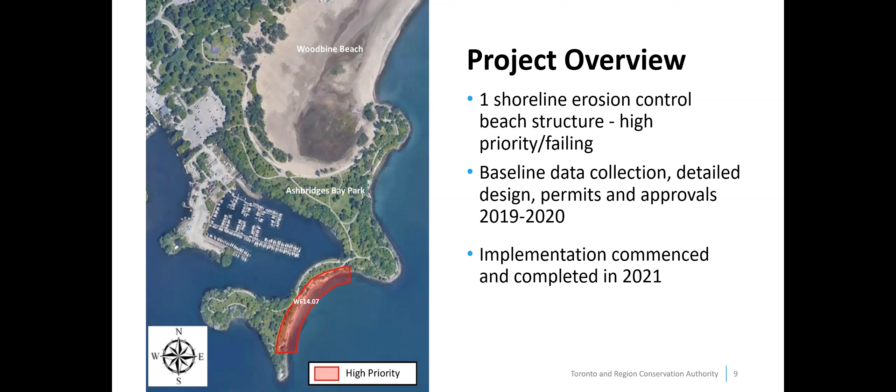So the first one is the Ashbridges Bay Major Maintenance Project, and this project focused on just a single erosion concern that has been monitored by the Erosion Risk Management Monitoring Team since 2006 and has been listed as failing since 2012. So erosion of this failing structure was further exacerbated in the 2017 and 2019 high lake events, and also with the 2018 windstorm that I've mentioned.

So some images of the concern here. The photo on the left shows significant backshore erosion following the April 2018 windstorm, which is when this structure was flagged as a high priority. Then as you can see on the photo on the right, as of 2020, the erosion was impacting the Martin Goodman Trail and increasing the risk to public safety.

For the design work, Baird Engineering undertook the coastal analysis and the detailed design, which ended up involving a riprap revetment, which is highlighted on this slide, and also a nearshore reef in the minimally impacted area, which is towards the upper part of the photo. So Galcon Marine Limited was retained to construct these two components, the revetment and the nearshore reef.

And they mobilized in June 2021 and work began right then and was completed by October 2021, so rather quickly. And due to the high profile park and the high public use of the park, all material was brought in by barge, which was approximately 25,000 tons worth of material.

The revetment is approximately 150 meters long, 7.5 meters wide, and is built of 200 to 900 millimeter sized riprap. And obviously the photo on the right here shows construction early on with Galcon laying the base and getting the slope ready for the sloped revetment.

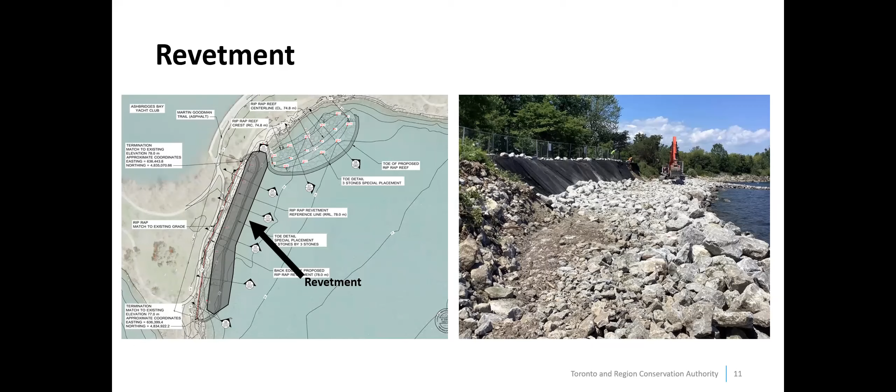The other component of the erosion protection is the nearshore reef, and it serves a dual purpose: it provides protection against erosion of the shoreline by reducing wave energy, but it also provides quality aquatic habitat. The nearshore reef is approximately 80 meters long and 20 meters wide, built of 300 to 900 millimeter size riprap, with the larger material out lakeward to protect the smaller material.

The crest of the reef is at average lake level, so 74.8 meters, high enough to provide adequate erosion protection while allowing it to be submerged and therefore better fish habitat when lake levels are above average. A navigation light is atop the reef as a navigation precaution.

In the photo on the right, you can see the construction barge. And then if you look closely in the near shore, you can just see the underwater reef slightly there.

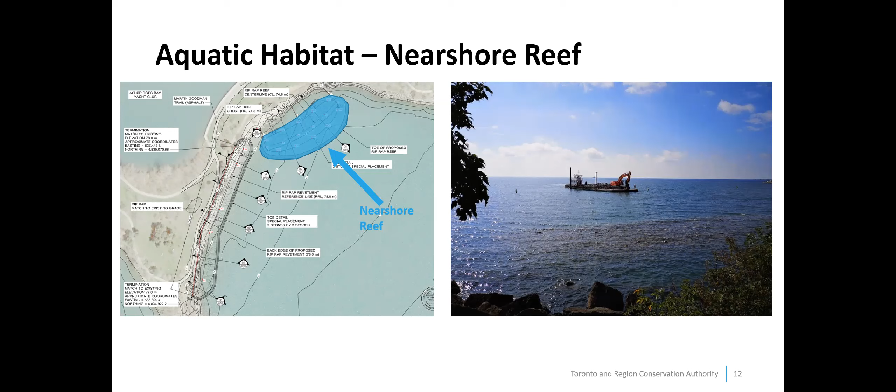As I mentioned, the project was completed in October 2021. The trail had to wait until the following year due to the weather, and it was repaved in July 2022. There's some final restoration and compensation plantings still to be done, being undertaken by City of Toronto's Urban Forestry Renewal Group. Staff will be continuing to monitor the functionality of the reef for at least 3 years, but probably longer—3 years is what's required as part of our Fisheries Act authorization from DFO, just to ensure that the habitat components are functioning appropriately.

So with that relatively recent project completed in this area, I thought I would discuss one that we are currently planning for implementation shortly, directly east of the previous one. This one's titled the Ashbridges Bay East Headlands Major Maintenance Project. I feel like we got to get a little bit more creative with our project titles, but.

You can see the image here, the location of it. The project area is approximately 680 meters of shoreline, and this one includes 3 erosion control structures that were constructed in the 1970s, including the beach in the middle in red, that is a high risk priority, and the 2 headlands that are medium, low risk priority.

The beach is comprised of concrete rubble mostly, and some scattered gravel and sand that extends to the near shore, but it's mostly just a concrete rubble beach. The headlands are comprised of various sizes of armor stone, ranging from 1 to 8 tons on the slope, and then we also have armor stone that's been displaced and is scattered amongst the near shore.

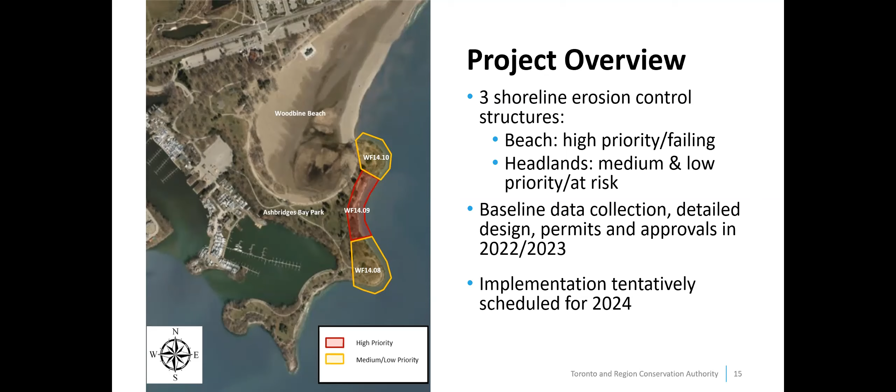These two photos show the concerns of each, the headland and the beach. The picture on the left shows armor stone displacement and significant voids in protection. This leads to further movement and greater instability. Generally you want a tight, compacted armor stone revetment where everything's together, there's no voids, stops overtopping, and waves or water receding back out and pulling out fines underneath. So what you see on the left is a failing headland structure.

On the right shows the concrete rubble beach—barely really a beach at all. This material, just on the fact of it being concrete, is susceptible to breaking down over time, which lessens its protective ability, and in general it doesn't provide a whole lot of protection against high winds and associated waves. I'll also note there's trails and walkways that run along the shore behind the existing protection for the majority of the site, and some sections are located close to the crest of the headlands and have experienced damage due to wave overtopping.

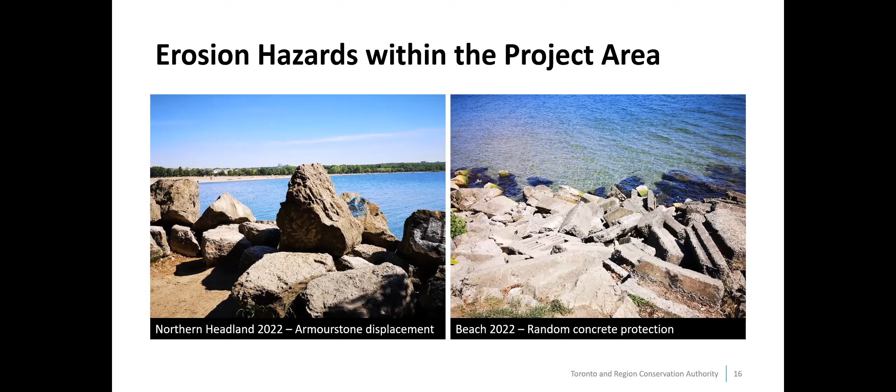We're in the detailed design phase right now for this, and the proposed design includes reconstruction or repairs along the whole length of the project shoreline. Most of the work on the headlands will be relatively minor, involving adding material to the existing structure to fill in the voids, and then placement of additional riprap and armor stone on top of the existing material for greater resiliency.

For the beach, the existing pieces of concrete with steel rebar protruding—which happens a lot on sites built a long time ago—will be removed, and then natural round stone will be placed on top as the new beach material.

So in consultation with Aquatic Habitat Toronto, we're proposing a surcharge revetment that incorporates fish habitat and minimizes navigational hazards. Navigational hazards are a bit of an issue in this area and negate some of our other more inventive habitat options, due to its proximity to boating facilities in the Ashbridges Bay Coatsworth Cut area. There are also boating facilities further east of Woodbine Beach, so we didn't want to go too wild with habitat components out further off of these headlands, as they are often navigated around.

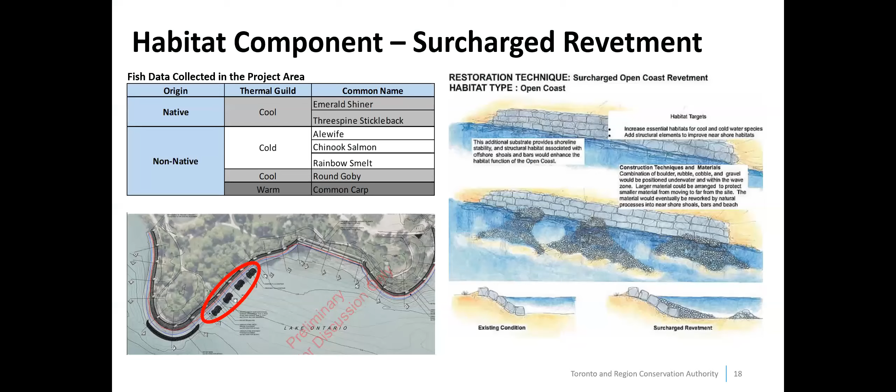And that was the last one for that Ashbridges Bay project. Lastly, we're going to go quickly through our Port Union Phase 1 beach curb major maintenance project, which is located in Port Union out in Scarborough.

The project is located in Port Union in the Village Common Park, and it's the furthest west structure of the Port Union set of waterfront structures, directly east of Highland Creek. The beach curb protects the waterfront trail and the Metrolinx rail berm and corridor behind it.

Interim work was completed in 2018 and included filling voids behind the wall and repaving part of the trail. The temporary solution was just to ensure that the waterfront trail was safe while long-term designs were prepared.

Long-term protection designs were developed in 2021, with final permitting into spring of 2022.

Key erosion hazards at the site include impact to the waterfront trail due to overtopping, freeze thaw, and washout; loss of beach curb stones causing settlement, voids, and instability; uneven pavement causing safety issues for trail users, particularly cyclists in this area; and eventual impacts to the rail berm and corridor behind the trail if left unmitigated.

Given the proximity to this Metrolinx berm, trail realignment in this area was not possible, as it sometimes is in other areas where there are erosion concerns.

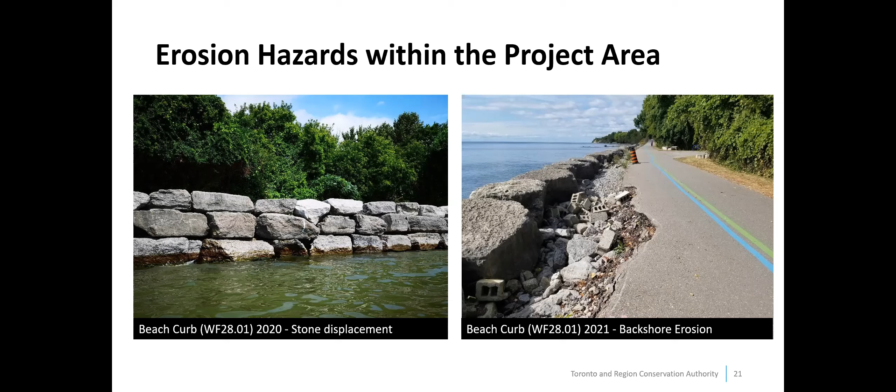Beach erosion: beach curb mechanics rely both on shoreline armoring as well as wave dissipation. Loss of sand during the high lake levels of 2017 and 2019 resulted in the beach curb now being fully exposed to wave height without dissipation, causing erosion of the waterfront trail and damage to the beach curb.

Prior, in 2015, the beach ran wide and long across the whole beach curb. Following the high lake events, a lot of the sand was lost out into the lake and moved down along shore. Now it's essentially just the beach curb, the armor stone you can see on the left side, without the beach in front of it to dissipate the wave action coming in. So it's just hitting a vertical wall of armor stone with nothing slowing it down before it gets there.

Given that the beach has been washed out by the high lake events, there's a need to install something more robust that doesn't rely on the presence of a beach.

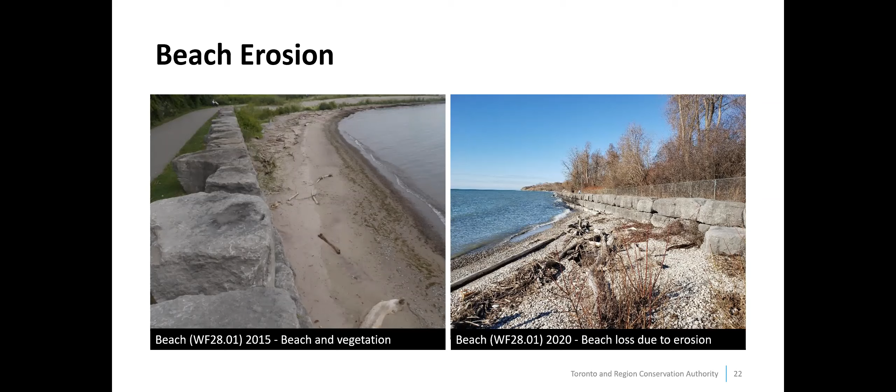We talked a little about barging in the previous project. We're going to go into more detail here about barging material. There are some access constraints for this site, including bridges, tunnels, and the Metrolinx berm to the north. There were limited places to truck materials or equipment, and the closest access point for trucking material was 1.7 kilometers away. So we looked at the advantages and disadvantages of trucking versus barging material.

The advantages of barging the material include decreased trail closure, as we only needed to close the immediate work area, and this is a heavily used site for both pedestrians and cyclists; reduced terrestrial impact to the trees and other vegetation; reduced repaving of the waterfront trail, as we would only have to repave our actual work area rather than the 1.7 kilometers of trail; and the ability to receive substantially more stone at once. A barge can carry a lot more stone than a truck, and this improves construction efficiency.

Disadvantages include generally a higher cost than trucking. There's often limitations with appropriate docking sites, especially in shallow water, and limited vendors actually in the GTA for marine aggregate supply. So we did some analysis on this, and we decided to go with barging of material for this.

Some of the main reasons were the limited truck access that was far away from the site, and the inability to schedule regular Metrolinx crossings at a single access point. This was a large one. It wasn't a regular crossing that any vehicle can go over, it was a more gated, protected crossing, which required a lot more coordination and risk management with Metrolinx to ensure everybody was safe crossing the tracks. We were able to do that with our heavy equipment to get them on site, but bringing in hundreds and hundreds of truckloads of rock across that was going to be problematic.

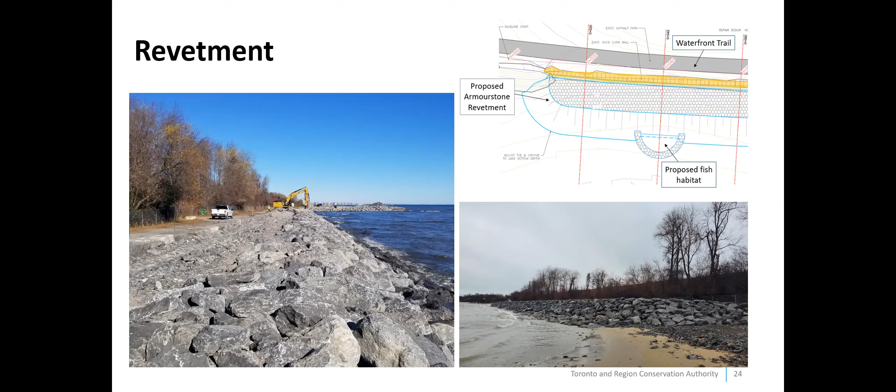For aquatic habitat here, we did submerged groynes. Like the other projects I've talked about this evening, this part of the shoreline is considered open coast, so there's a low propensity for habitat, and we're trying to create more. Habitat discussions for this project site recommended mixed size substrate and a preference for rounded stone instead of angular at this location.

To this end, we've installed what we call submerged groynes, which are similar to the surcharge revetments of the previous project. These groynes extend out a little bit further than the surcharge ones of the previous project, and they're predominantly for habitat purposes. They do offer minimal erosion protection, but the primary purpose of them is to create aquatic habitat.

The groynes are constructed with larger armoring on the outer edges to promote stability of the smaller mixed sizes of stone in the interior. The structures have the potential, especially the way they're spaced, to encourage sand retention on top of or between some of the groyne structures, and hopefully potentially start to build back some of the beach that was lost.

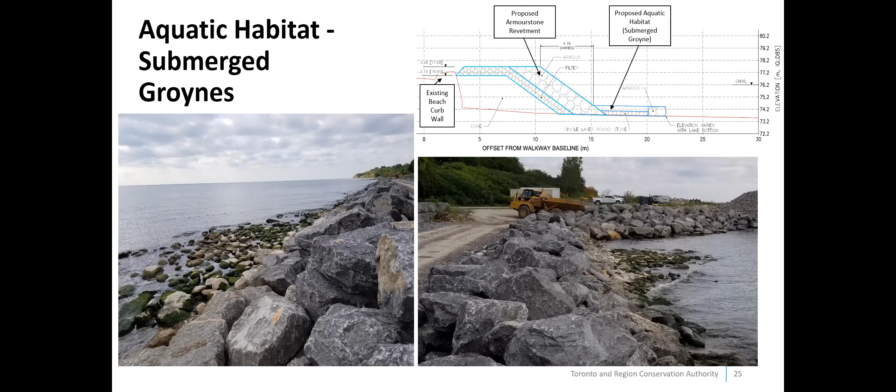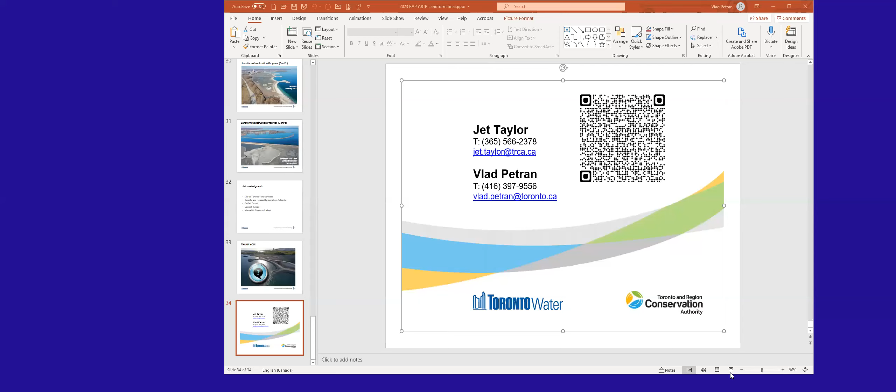Whoever is interested in the city's stormwater management projects, there's a QR code on our last page. I'm not sure if you can see it now. Yep, the QR code. That would lead to the City of Toronto stormwater management projects, and there's a link there for Don River and waterfront projects. So we can leave that up for a few more seconds.

Thanks, Vlad - I forgot to direct people to that. My mistake. No, that's okay. That would provide more context and more details on many other projects. So I'm going to stop sharing now. That's all I have.